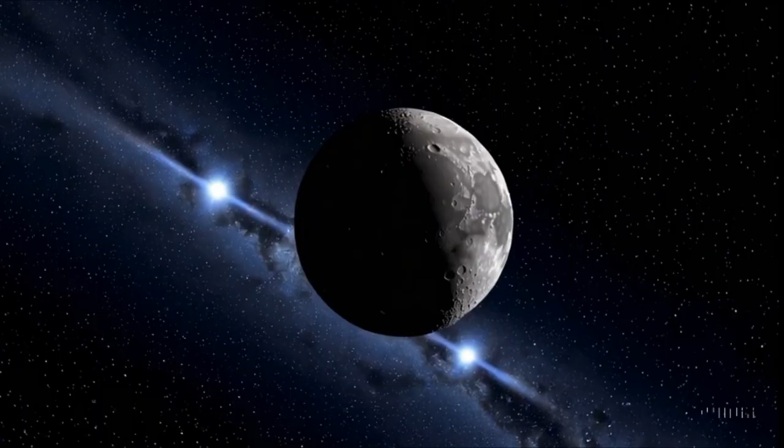Recycling and Manufacturing Process Overview. Let's explore our recycling process. Our system targets key waste streams expected in an 8-person lunar habitat.

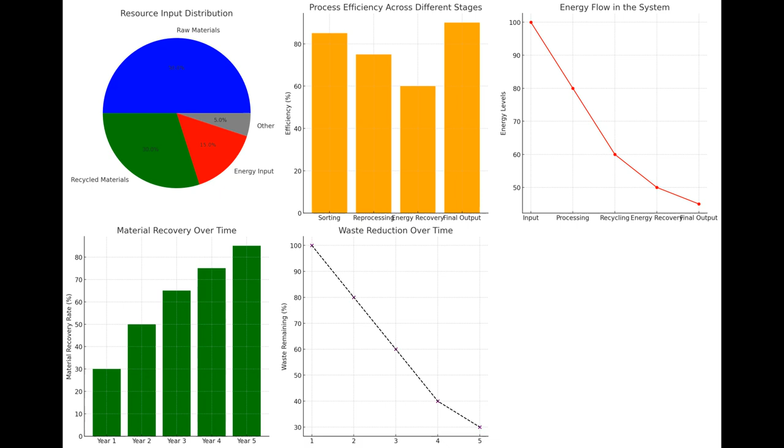Plastics, encompassing packaging materials, plastic containers, and rigid plastics, about 40% by mass and 35% by volume. Textiles, fabrics covering clothing, towels, and fabric scraps, roughly 30% by mass and 25% by volume, unified into a stream of about 1,000 kilograms and 10 cubic meters.

Metals, including structural scraps and maintenance residues, about 20% by mass and 25% by volume. Composites, such as carbon fiber reinforced plastics, roughly 10% by mass and 15% by volume. We also address supplementary streams like foam packaging, EVA waste, and food packaging.

For plastics, we use controlled pyrolysis to produce recycled polymer pellets, yielding around 450 kilograms per day from 500 kilograms of input. Textiles are processed via hydrothermal methods to recover fibers, about 120 kilograms per day from 150 kilograms of input.

Metals are refined into high-quality ingots, approximately 180 kilograms per day, and composites are separated into fibers and resin fractions for further use. These processes are all designed to work together in a closed-loop system, ensuring that every fraction of waste is transformed into usable feedstocks or energy, integrated recycling modules.

Now, let's examine the individual modules that make up our system. First, the pre-sorting and identification unit uses XRF and Raman spectrometers along with high-resolution vision systems to accurately classify incoming waste. This ensures that every item is properly routed.

Next, our fragmentation and shredding module reduces waste into uniform fragments using high-torque shredders with carbide-tipped blades, followed by vibratory screens that sort particles by size.

Then, the separation and purification module employs magnetic, centrifugal, and filtration systems to isolate different materials, ensuring pure streams of plastics, textiles, metals, and composites.

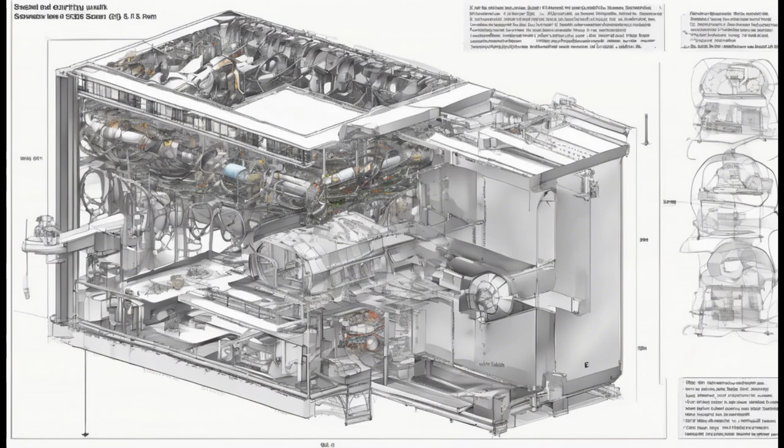Now let's take a closer look at the physical components that make up our system. Our detailed CAD models illustrate the layout and key dimensions of every module. For example, our pre-sorting unit, which occupies approximately 1.2 million cubic centimeters, is designed with precise access panels and mounting interfaces for maintenance.

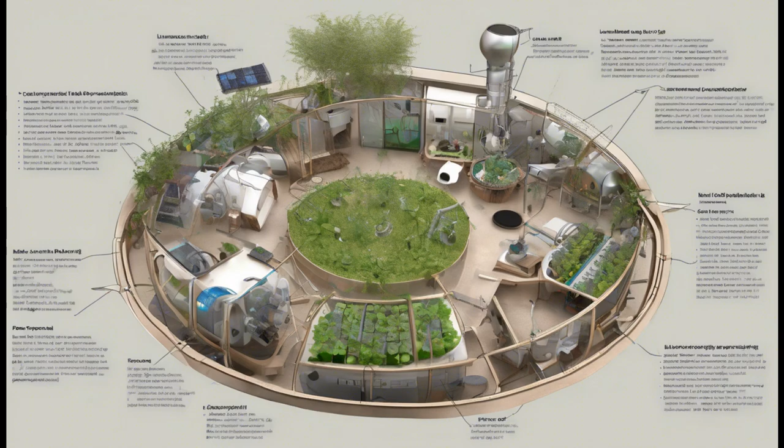Our equipment list details every module. The fragmentation and shredding module weighs around 200 kilograms, the separation and purification module is about 300 kilograms, the conversion and manufacturing module comes in at 350 kilograms, the energy recovery module weighs 250 kilograms, and our digital twin and control system is a compact 100 kilogram unit.

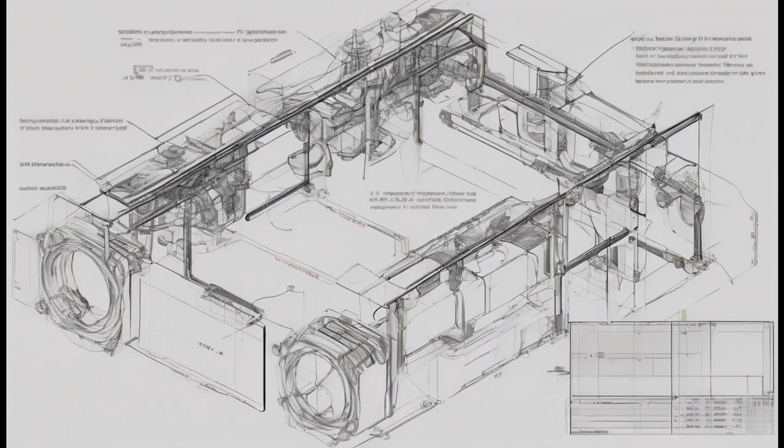Additionally, our auxiliary systems, comprising conveyors, safety enclosures, sensor mounts, and access panels, ensure smooth material handling and quick maintenance. All components operate within the required environmental conditions, 0 to 50 degrees Celsius, 90 to 110 kilopascals, and are designed to work seamlessly together, embodying our commitment to zero waste.

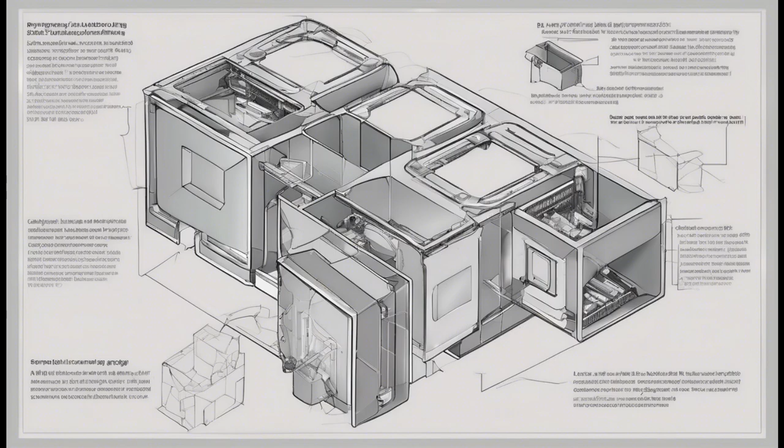Moving forward, our development plan for Phase 2 is structured into 3 key phases. Phase 1, months 1 to 6, focuses on material testing and subsystem validation. We will finalize detailed CAD models, run simulation analyses, and prototype key subsystems under simulated lunar conditions.

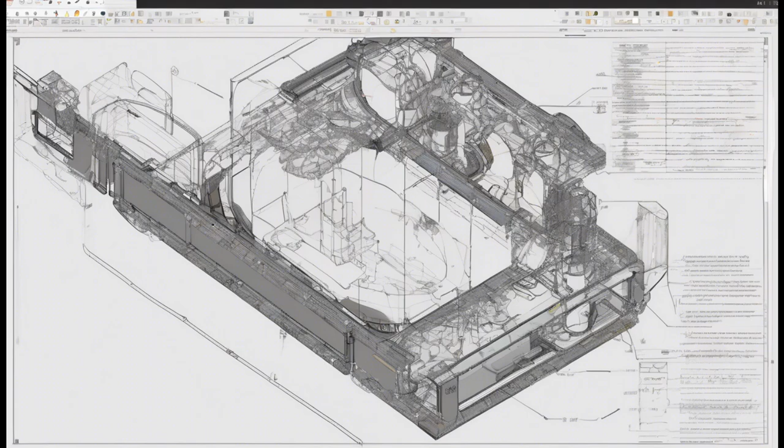Phase 2, months 7 to 12, develops a fully integrated prototype. We will fabricate custom components, integrate all modules, and conduct rigorous tests in a controlled laboratory environment that simulates lunar conditions. Phase 3, months 13 to 24, involves full system testing in preparation for potential lunar deployment.

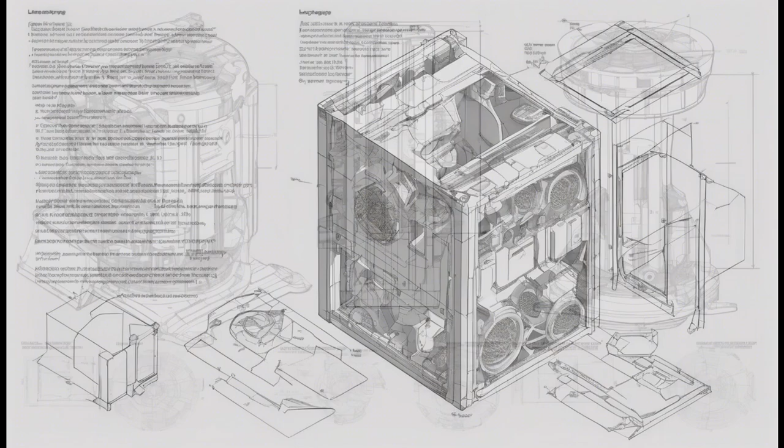This phase involves assembling a field-ready prototype, running extended tests in thermal vacuum chambers, and refining the design based on performance data. We have also performed a thorough risk assessment. For instance, we will mitigate thermal failure by using advanced heat-resistant materials and optimized cooling, and address integration challenges through standardized modular interfaces and incremental testing.

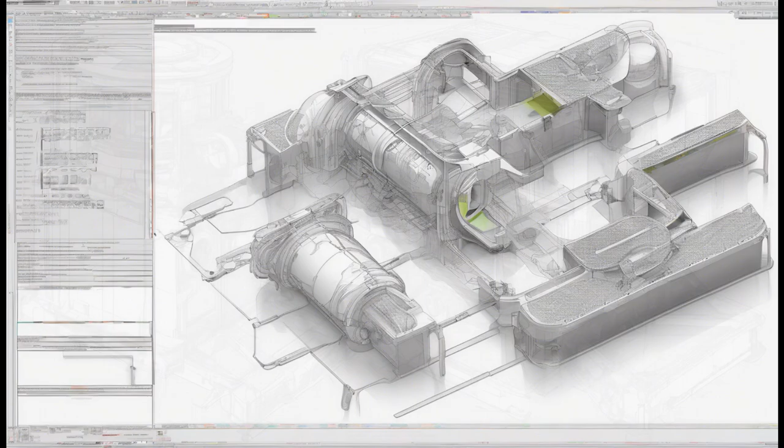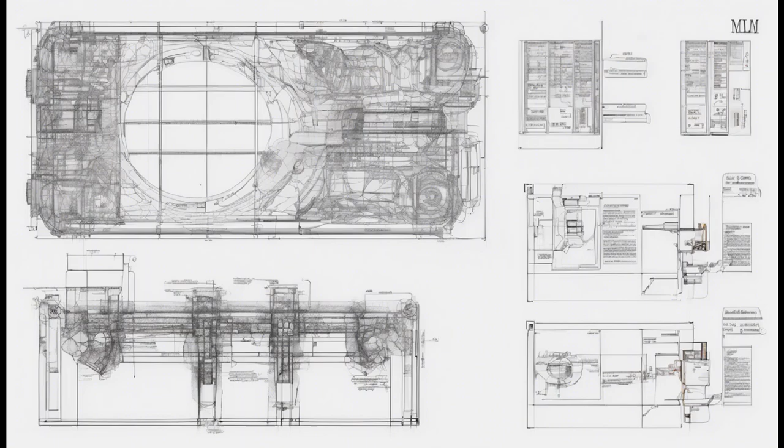Our solution offers transformative long-term impact. It not only addresses lunar waste management but also provides adaptable, sustainable recycling technologies for terrestrial applications. With its modular and scalable design, our system can be expanded to support larger lunar settlements or adapted to revolutionize waste management on Earth, creating resilient circular economies that reduce resource dependency and environmental impact.

We are actively pursuing partnerships with academic institutions, industry leaders, and government agencies. Our collaboration with the University of Alabama will provide world-class research facilities to further refine and test our prototype, opening extended research opportunities and fostering innovative projects across borders.

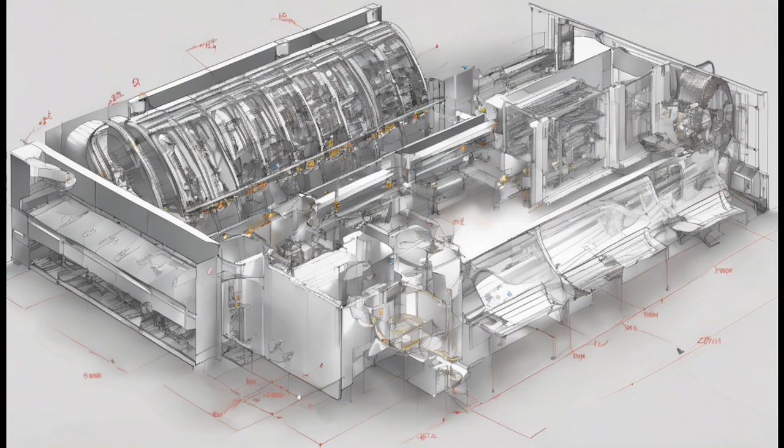This project sets the stage for a new era of sustainable space exploration and terrestrial resource management, where every ounce of waste is transformed into energy, raw materials, or finished products, ensuring a cleaner, more resilient future for all.

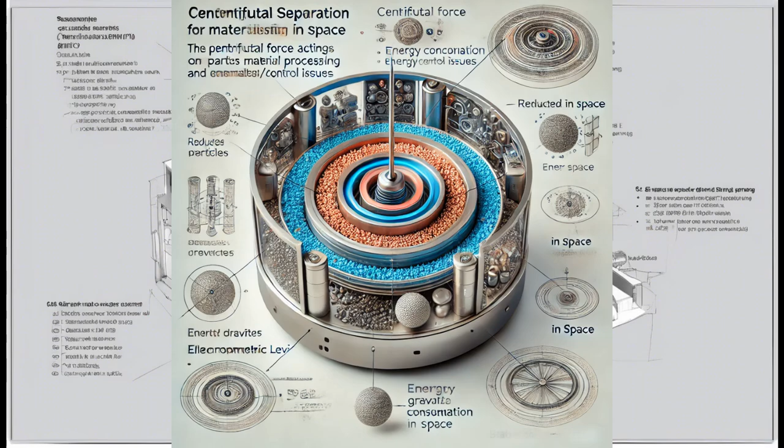In conclusion, our 0/0 Systems project redefines recycling and habitat design. By integrating advanced recycling technologies, digital twin simulations, and a modular design, we achieve near 100% material recovery and energy efficiency. This system not only meets the challenges of a lunar environment but also offers scalable solutions for Earth's waste management needs.

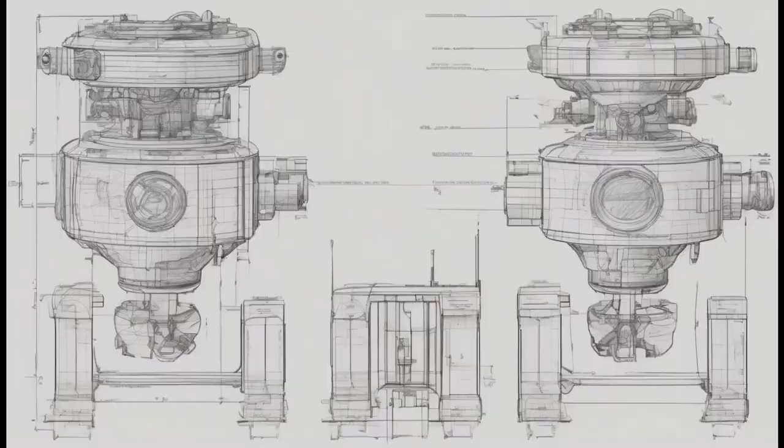We invite you to join us on this transformative journey toward a sustainable future, both in space and on Earth. Together, we can push the boundaries of innovation, ensuring that no resource is wasted and that life continues to thrive beyond conventional limits.